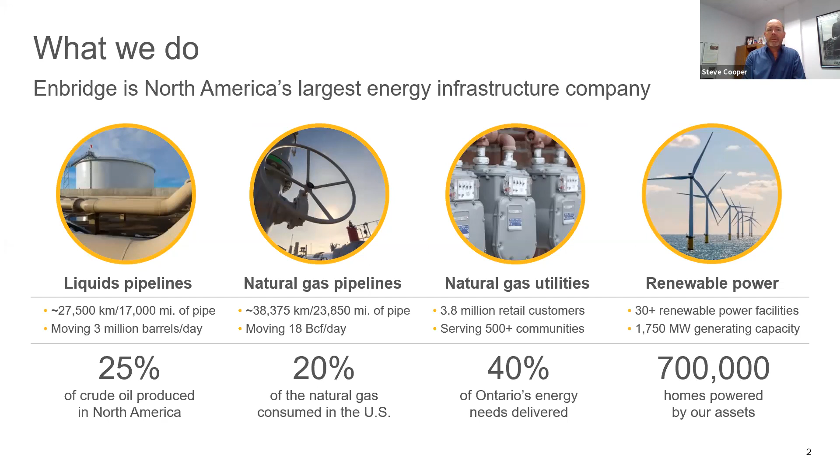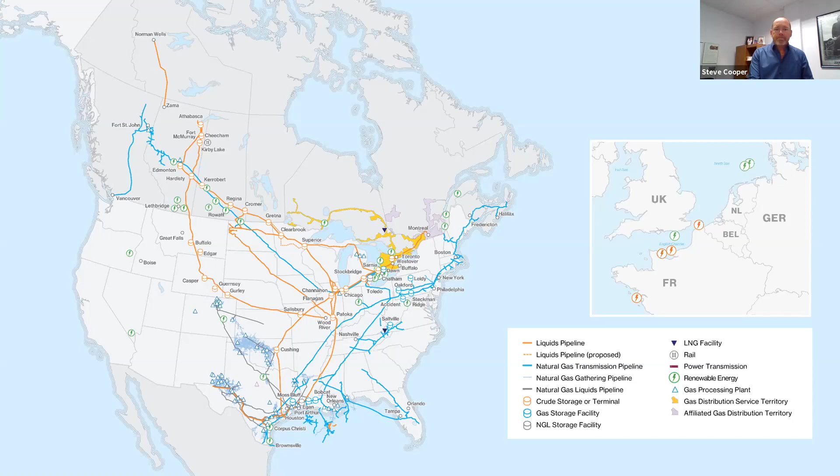We've been around a lot longer than I have, even though some days I feel like I'm 170 years old, but today I'm feeling pretty good. So hopefully I don't forget where I'm going with all this.

So 170 years, a lot of experience in this business. We've got 3.8 million customers. We're heating more than 75% of Ontario homes. And within this distribution environment, we have 147,000 kilometers of pipe, servicing our mains and services. So mains down the streets and services to the homes. We've got a lot of pipeline in the ground with those other divisions, but it really pales in comparison to the amount of pipe within the distribution company itself. That's enough to circle the world 3.5 times. So quite an extensive network of pipes, and that's going to be very relevant as we move through this.

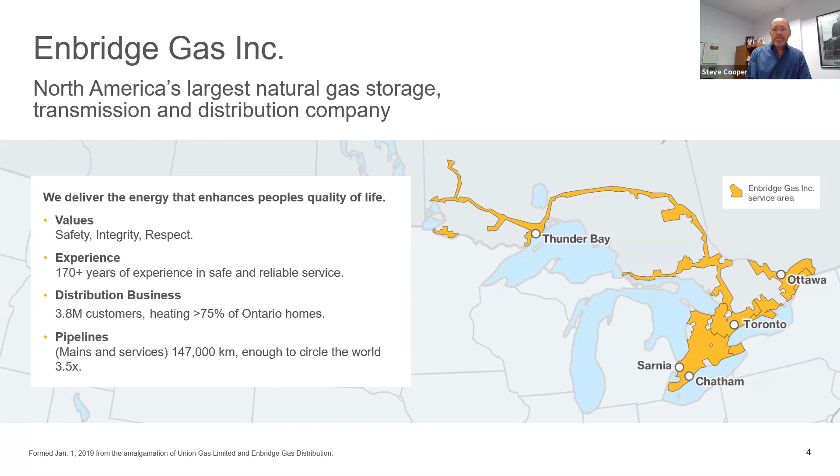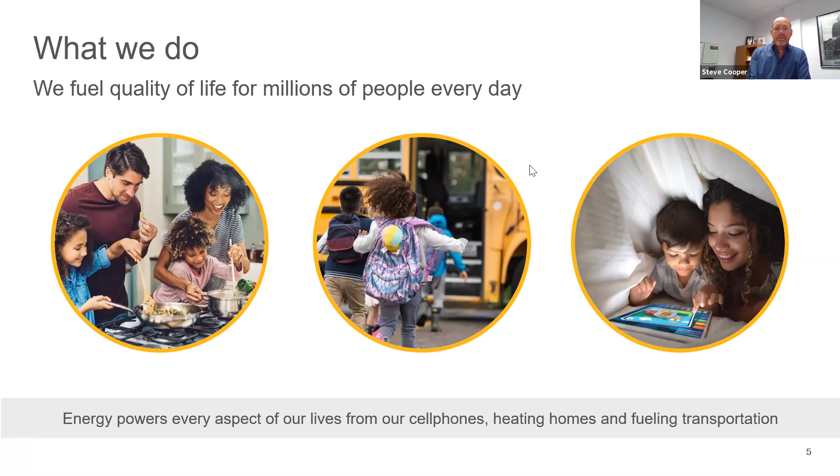So what we do in the utility business, well, we fuel the quality of life for millions of people every day. So it's really important that we get that right. Our customers and our communities rely on us to deliver energy, deliver it safely, and make sure it remains uninterrupted. If we don't get that right, really nothing else matters. And that's why this topic is very important to us, and you'll see why as we continue on here.

Safety, again, #1 priority. We've invested $10.5 billion between 2012 and 2019 just to maintain the integrity of our system. Through that, we performed almost 40,000 pipeline inspections. We monitor our lines 24/7, and we do hundreds of extensive emergency exercises every year. All of that is to make sure that we're operating a very strong and efficient network that we can respond to very quickly and maintain that safety and that integrity.

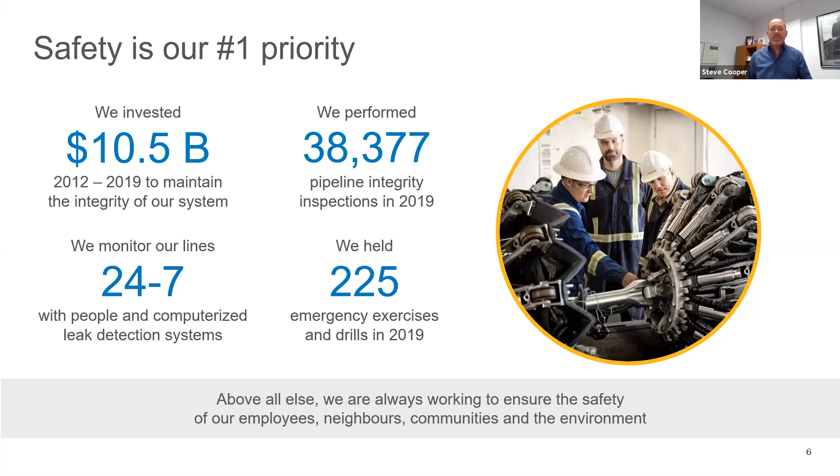So we're going to get right into it now. When we're talking about crossbores, a lot of people ask, what exactly is a crossbore? The standard definition is a utility crossbore is an unintended intersection of an existing underground utility by a second utility. So fundamentally, two utilities, you really don't want them impacting one another. Obviously, if that happens, you're going to compromise the integrity of those systems.

In today's discussion, we're going to be talking specifically about gas lines and sewers. You can see here some imaging to give you an idea of what that looks like, where a natural gas line has intersected a sewer and gone through it. That's where we typically see this type of thing, and I'll explain why in a little bit.

But the real challenge here is you can impact a sewer and it can remain undetected for years, even decades, because it doesn't necessarily have an acute response immediately. There can be a crossbore in place for years before any kind of disruption occurs on that line. And that may or may not be because of the gas line itself. It could be just the hole that was created, the void can fill in, roots can get into it, that sort of thing. And that can take years to build up. So that makes almost a separate challenge in and of itself.

So just to sort of walk back to the beginning. So how do they even happen? Well, like most utilities, well, pretty much all utilities today, we use trenchless technology to install our underground infrastructure. There's a lot of reasons for that. Obviously, it's very efficient, it's very effective. It allows us to put pipe and other utilities into the ground without impacting infrastructure. We can get underneath roads, we can get underneath rivers, trees, lawns, you name it, with a minimal amount of disruption.

Unfortunately, though, that means you've got to make sure you're not impacting anything along the way because you can't really see it. So we get locates, we expose it to make sure that we don't cause any unforeseen damages. But sewers specifically are difficult because they tend to be non-metallic, so you can't use traditional locating equipment to find them. They don't usually have a tracer wire, which is what you would have in place in those type of scenarios. The records could be incomplete or outdated.

And most municipalities don't provide sewer lateral locates, and sewer laterals fundamentally are sort of part in the municipal environment, part in the homeowner's part of the lawn, so to speak. And that means that there's a bit of an ownership gap there. So homeowners obviously aren't prepared to go out and locate their own sewer lines. So it can be very difficult to find them.

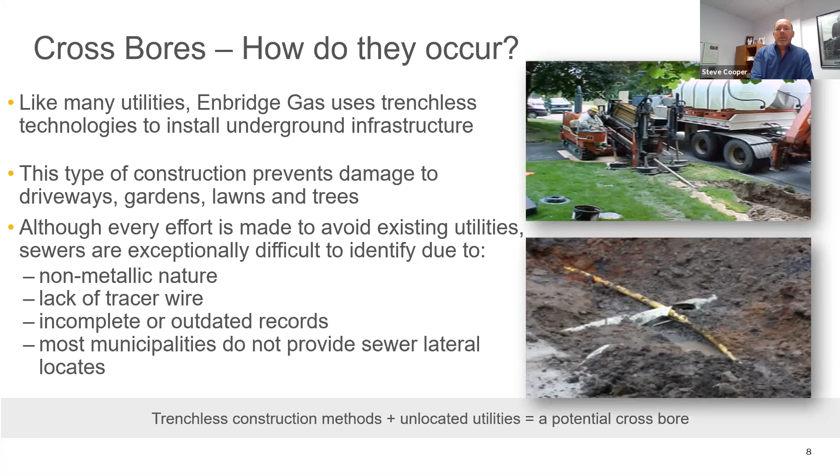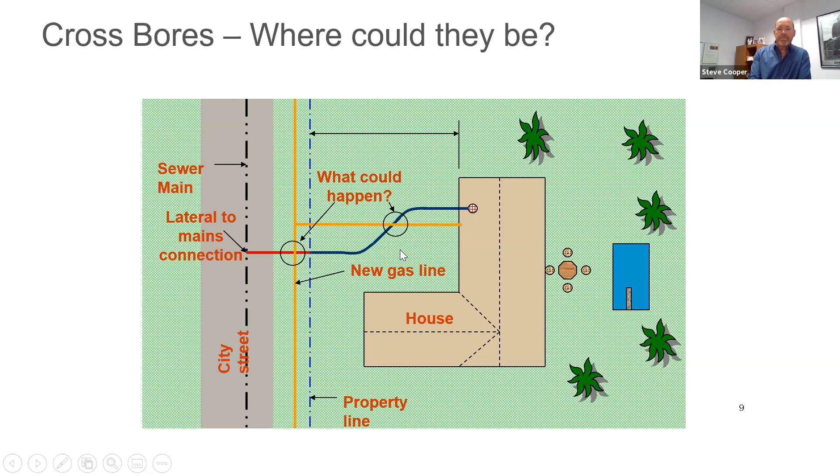So once that happens, like I said, it could last indefinitely without a problem, but there could be a blockage that occurs. And if that happens, how do they get damaged? Well, the sewer blockage occurs, an attempt is made to clear it with an auger, a snake, or a water jet. So a customer would usually call a plumber, or they might go to the hardware store, their local rental agency, and rent the equipment themselves. And I've got an example here in the middle of the typical types of clearing equipment that might be used.

And they start pushing that down the line to try and clear that blockage, and they may inadvertently impact the gas line, which would allow gas to flow through that sewer system back up into the house, and that could create a serious problem. Also, it's important to note that it may not just go back up into that specific building. Once gas is getting into the sewer system, it could literally show up in other homes as well.

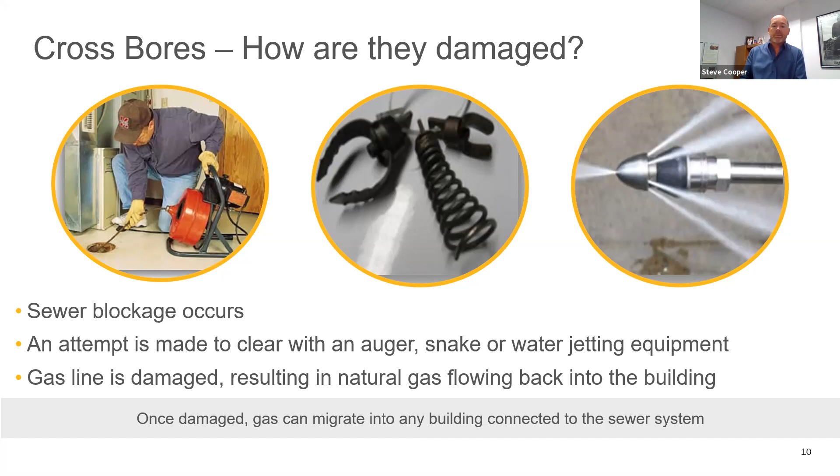So what's the risk? Undetected crossbores, obviously,

Sorry, looks like my internet connection was a little wonky there.

But yeah, undetected crossbores pose a serious risk for fires, explosions, and here's an image on the right here of what, worst case scenario, could happen. That can obviously result in property damage, injuries, loss of life. These have all occurred. There's been 20 such occurrences in North America.

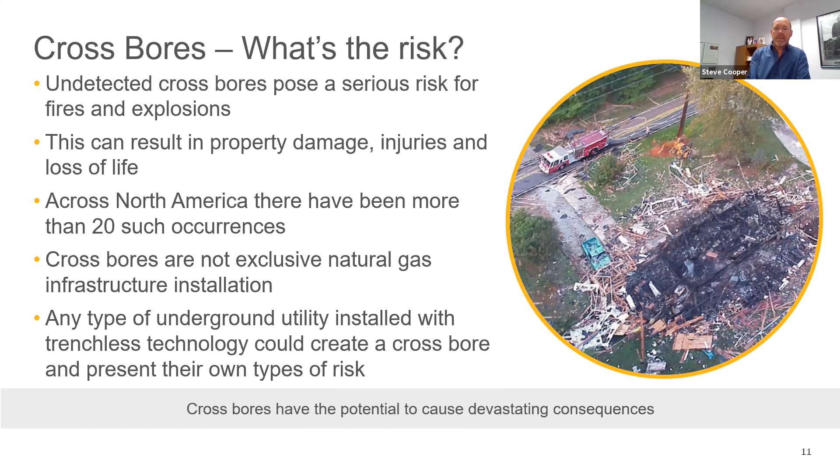Crossbores are obviously not exclusive to natural gas, but that's what we'll be focusing on today. Any type of underground utility could impact the sewer line, and that creates its own risk. Obviously, a power line running through it is not something you want to run into either. But again, we'll be focusing on the effects of gas and what we're doing to prevent that from occurring.

So one of the things, well, the most important thing that you definitely need to know, if you don't take anything else from this presentation, is if you do have a blocked sewer line beyond the outside wall of your building, you could damage it if you tried to clear it. So damaged gas lines can cause natural gas to leak in your home or building.

Before you call a plumber or rent any motorized or water jetting equipment, make sure you call Ontario One Call if you're in Ontario to arrange a free sewer safety inspection. Really, really important. We will respond. Our target is to be there within 2 hours to make sure it's safe to proceed with clearing activities. And a little bit later, I'll walk through how all that looks.

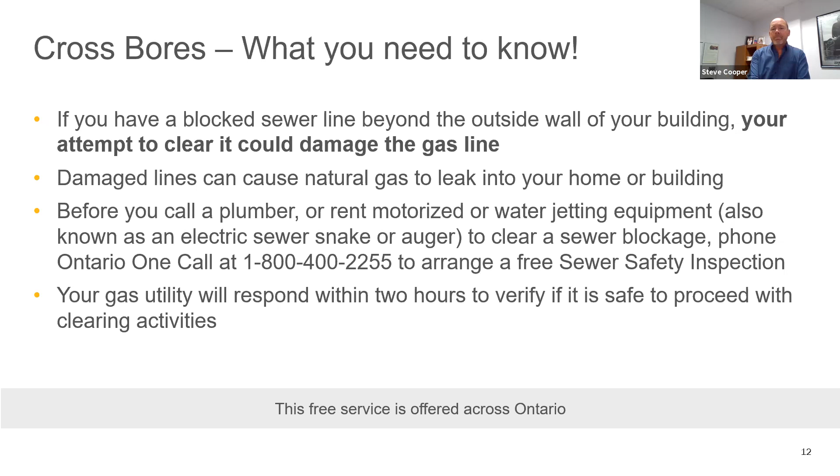Just to give you a sense of the program and how it's operating, we get about 13,000 one-call requests annually for this type of investigation. We do find on average about 100 crossbores every year. So it's a relatively small number. They're out there and we're actively trying to find them, but that's about the ratio that we're getting.

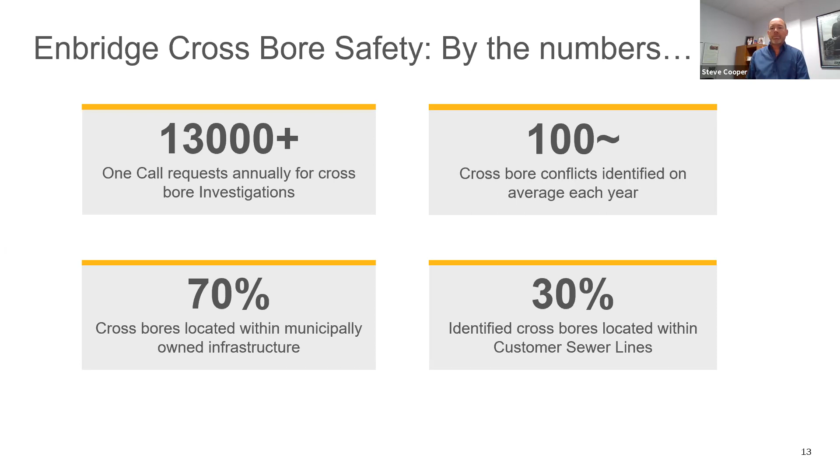70% are showing up in municipally owned infrastructure, so that part within the right of way that I showed earlier, and 30% are showing up in the customer owned portion of those sewer lines.

So the process, I'll take you through how this all looks, right? So the homeowner, plumber, municipality would identify a blockage, and hopefully, if we're getting the message across, they're going to call Ontario One Call and report that blocked sewer. Ontario One Call will dispatch our locate service provider, and they will respond 24 hours a day, 365 days a year. Doesn't matter. They'll be out there to take a look at it and try and identify what's going on.

So that locate service provider, when they show up, they're going to locate the sewer line, they're going to locate the gas line. They may have to do a video inspection. We've got push cameras we can force down the line. We can look for those potential crossbore locations, and then they will pass or fail that inspection depending on if there's clearance or not.

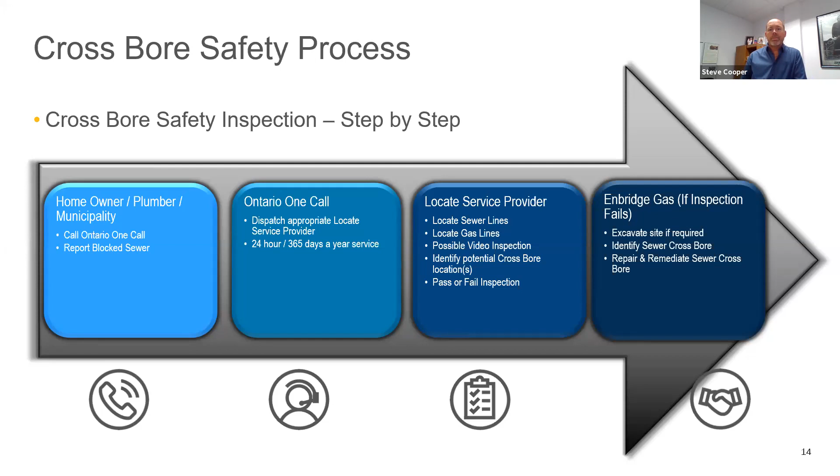If it fails, so in the event that the sewer line and the gas line are, we either see it, we can tell there's an actual crossbore there, or we're suspecting it because we just can't get the proximity clearance that we're looking for, that would fail. And in that case, we will actually excavate the site, try and identify that location, that crossbore issue. If there is a crossbore, we'll repair and remediate it completely. But if we can tell that there's enough separation there that we're in good shape, then we would provide a clearance, and a homeowner or plumber could carry on with their clearing activities.

So just some of the methods that we use here, to give you a bit of an idea of what this looks like. As I mentioned, we're trying to get to a horizontal and vertical clearance between the natural gas line and the sewer line, making sure we've got enough separation that we're comfortable saying, you're clear to go ahead. Part of that, we may use a video inspection. So the top left image is a camera system that we would typically use. It's a push camera again that we would put down the line and then look for evidence of what's going on, whether it's all clear or is there something impacting it.

We also have an opportunity to use what we call launch from main robots. So these are really kind of cool. We put those down the main line of the sewer, run those down the main line, and then it can sort of shoot up the lateral portions and take camera and location of those lines, and it allows us to get in from the street side if we can't get access to the home or we're running into a blockage or some other problem there.

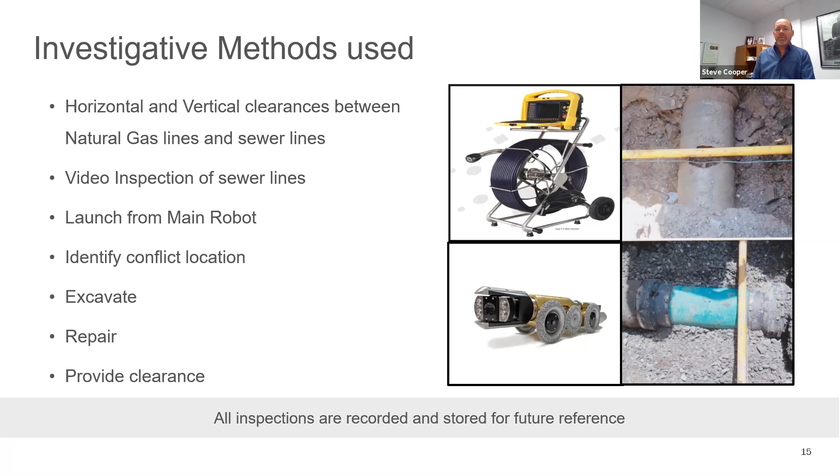And then the two images on the right side are what we would often see, right? So that one at the top is one where we didn't actually go right through the sewer, but damaged it enough that it blocked it off. And then the one on the bottom right is what a repair would typically look like. So the damaged portion's been removed and a new piece has been put in to correct it. So that's really the whole process of how we go through it: identify the conflict, excavate it, repair, and then again, provide that homeowner with the clearance to move forward.

So, like I said, one thing to take away from this, but if nothing else, remember to call One Call before you clear at 1-800-400-2255. Really just keep an eye out for these types of things. If you see it, definitely use this service. If you're talking to your neighbors or your family members and they're mentioning they've got a problem, just try to communicate this to them. We'd really appreciate that.

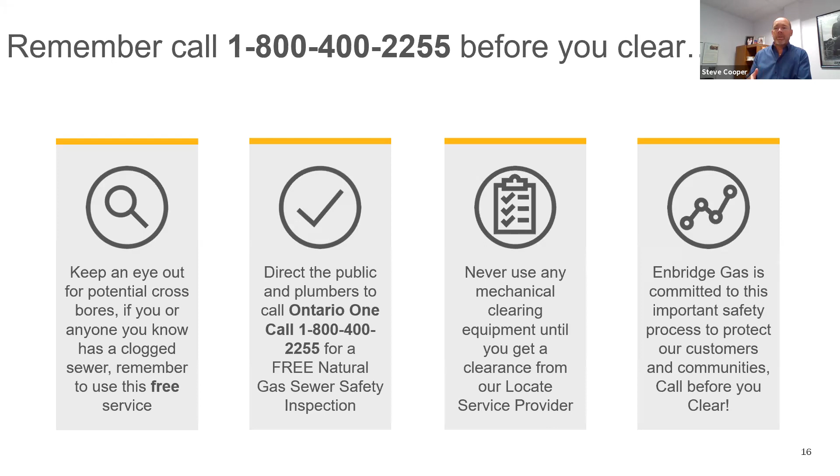And again, direct the public and plumbers to Ontario One Call. And again, it's a free service, 365 days a year, 7 days a week. Never use mechanical clearing equipment until you do get that clearance. That's really, really important. And last but not least, we are very, very much committed to this. This is not going away. This will be a program that will be in place indefinitely. So it's not one of those things where you have to worry about it not being there in the future. It will always be there.

So that's really the reactive side of the program, but there is a proactive side as well. We're not really content just to wait for these things to materialize and react from that perspective. We really want to get out in front of them and find them before it ever becomes a blockage. Like I said, it could be years or decades before we have a problem. So we want to find them and remediate that situation long before a customer has a problem with their system.

So to do that, we use analytics. We've got risk profiles. We create heat maps. We identify high potential areas where this might be occurring. That could be a high water table, it could be areas where we've seen this type of thing before. And again, we use all that data to create areas that we want to go in and do a proactive approach. So we work with our contractors, we screen them, we remediate the area and clear those locations we identified.

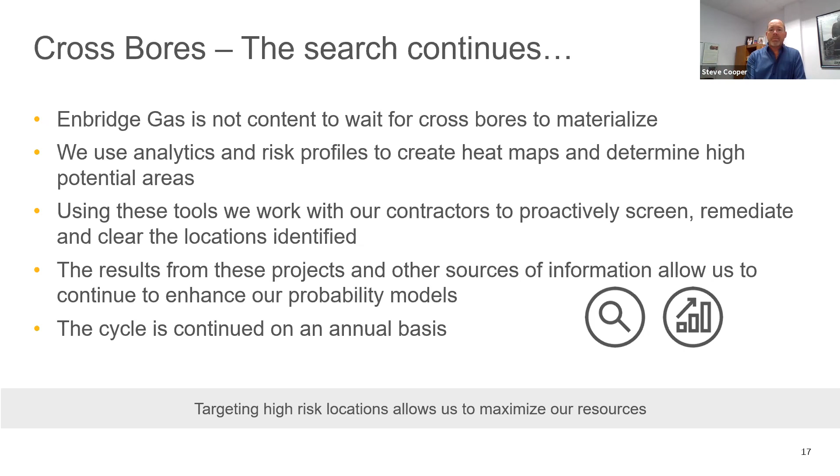And then after we do that, those results flow back into our analytics, and we use that to enhance the probability and again, zero in over and over again until we establish a pattern where we're using our resources in the most effective way possible. So we do that on an annual basis, and we're just getting started with it, but it's going quite well, and we will continue to zero in as we get more and more information through this program.

So that's the sort of proactive side of things, and then we move into the preventative measures, because all that being said, we're responding to them as they get created, or we identify them, we're trying to proactively find them or remove them, but that only works if you're not creating more of them. That's the last thing we want to do. So we need to stop it where it is, deal with what we've got, and not create any more. So how do we prevent this from happening?

Well, as I said, we use a lot of directional drilling, trenchless technology, which is great, but fundamentally, if we can open trench, we can avoid this altogether. So we're really trying to move back where we can to open trench style installations. It just eliminates a lot of that risk right out of the gate. But of course, that's not always possible.

You still have to cross other infrastructure and streets and that sort of thing where you're not really likely to just open trench it. So in those cases, we're actually getting private sewer lateral locates. We're hiring our own contractors to go out and locate these sewer systems and make sure we understand exactly where they are, and then expose them to make sure we're not impacting them, which is a bit of an undertaking, but it's something that we just have to do.

Typically, what we did in the past few years, we would focus on the specific address that we're servicing, but now we're actually expanding that. We're picking up homes in the general vicinity. So houses on either side, maybe across the street, could be up to 4 or 5 different homes that we would want to locate, just to make absolutely sure that we're not impacting any of the private sewer laterals.

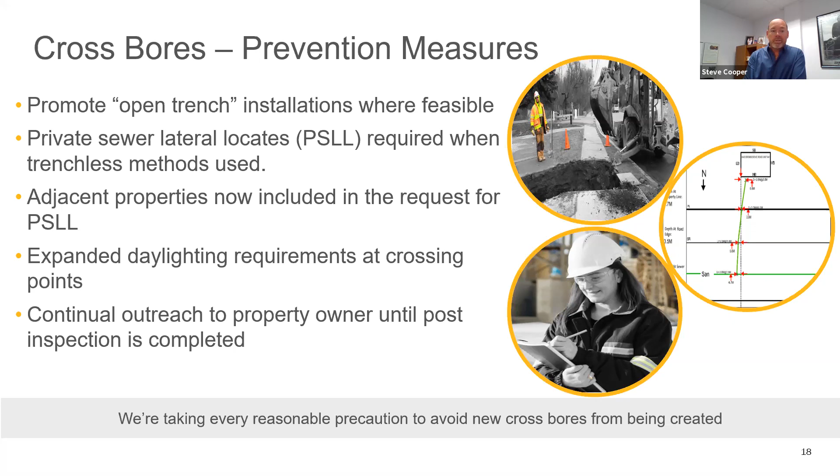So really, in a nutshell, we're just taking every possible precaution to make sure that we've got this under control. Probably the most exciting slide in the deck, I would say, is there's still room to grow on this. There's still opportunities to improve. So we've got a lot of future program enhancements underway.

So one of which is coordinating and aligning our messaging with Ontario One Call and other utilities. We're not the only gas utility in Ontario, but we're all working together to try and deal with this potential problem. So one of the ways we can do that is leveraging each other and making sure our messaging is the same and we're coordinated in our communications.

It's really important that the message is concise and consistent, and it's set up in such a way that homeowners are getting the same message from different sources, whether it's One Call, Enbridge, or any other utility for that matter in this space. You don't want different types of terminology and that sort of thing that might confuse people. So really important that we're aligned on that.

Targeted advertisements, making sure we're reaching people at the right time in the right places. And part of that is education of trades and service providers, the rental companies, the hardware stores, the plumbing community. Those are all areas that we really want to enhance our communication with and make sure that we're getting the message through to them as much as possible.

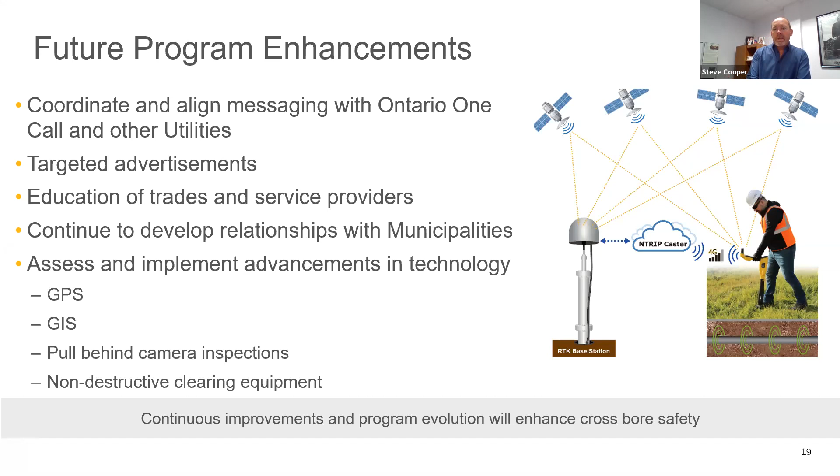This is not an extensive list by any means, but gives you an idea that there's definitely room to improve. And as the world evolves, we want to take full advantage of all of that. So that is pretty much everything I have in my deck, and we can open it up to Q&A now.

So, Juan, you with me? Yes, I am. So let me have the questions here.